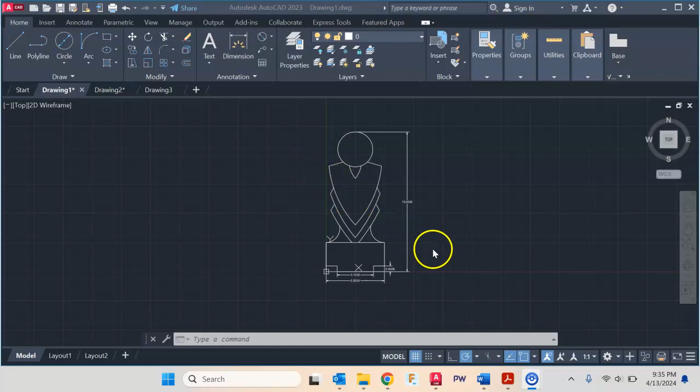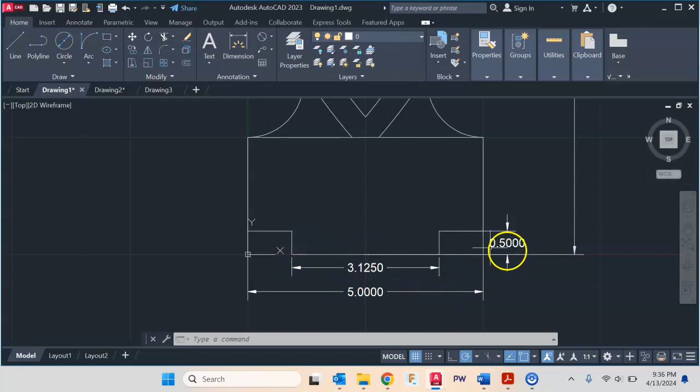Just to give you an overview of the process to get started, I went ahead and used the overall size parameters to create a design to show you. Here I have a potential trophy or award that I could use with the LED base. The overall width here is 5 inches by 12 inches. The cutout at the very bottom has a little bit of a shoulder on both sides - think of this similar to a tenon, like a mortise and tenon joint that we make here in class. That needs to be 3 1/8 for the length and 1/2 inch deep.

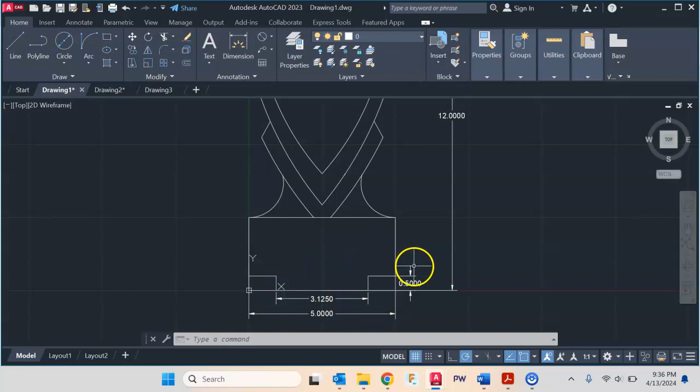So the best thing for you to do is draw the 5 by 12 box or rectangle like I started with, and then give yourself some offset lines, similar to the keychain project, or some construction lines to offset, so you can find dead center and be able to offset the drawing both ways.

Okay, so I would go ahead and create a rectangle. I'm going to start by drawing this in and putting in my measurements, because you can't measure after you've drawn the rectangle - you have to measure as you are creating it. So 5 inches, I'm going to lock that in by hitting the tab button, and 12 inches as well.

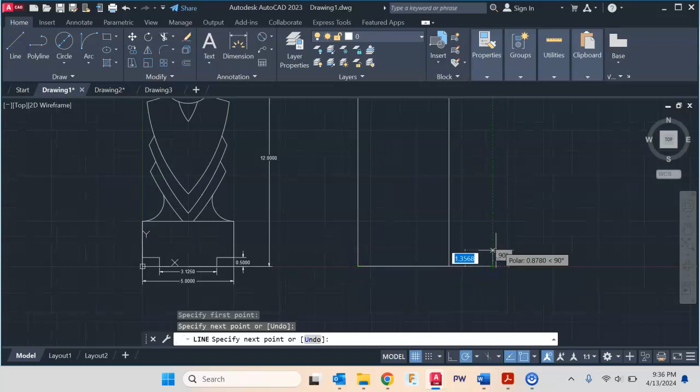At this point, I can go ahead and use the line tool and draw some reference lines here. I like to do one along the bottom edge as well as one along the side.

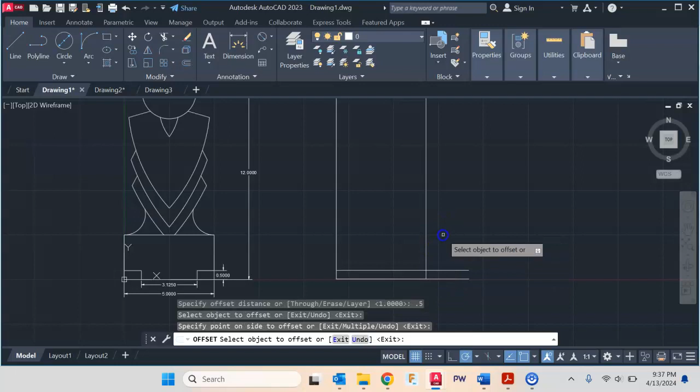So I know that the bottom piece of the acrylic can't be any more than 1/2 inch, so I'm going to choose 1/2 inch for that. I'll use the offset tool, type in 0.5, and select the bottom line that I drew and move that up into the rectangle. Then I'll offset that vertical line off to the left side, but I have to change how much I'm offsetting.

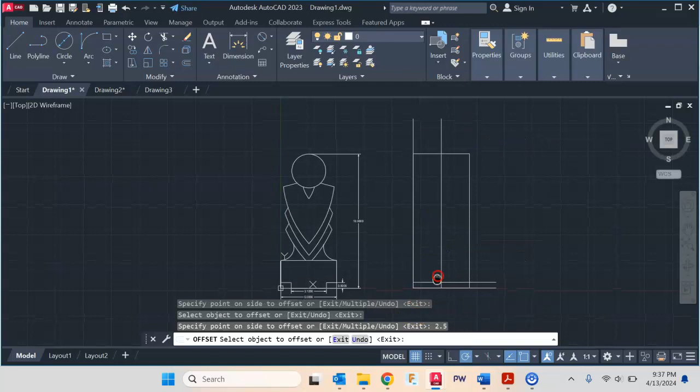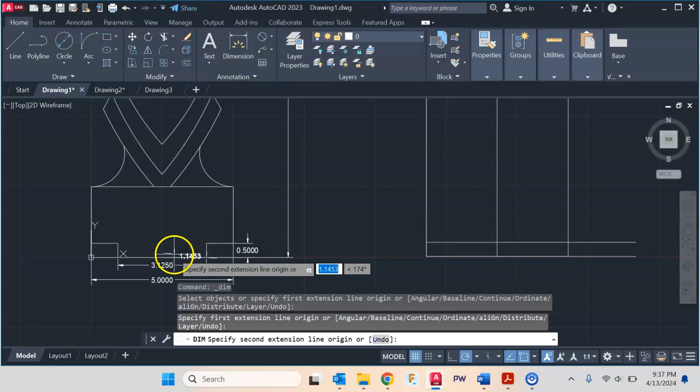So again, the overall size you can work with is 5 inches, so I'm going to put this in the middle of 5, which would be 2.5. From here I can give myself another offset to show the shoulder. As a review, what I did was draw half of this bottom piece so I can find the center, and that is 1.5625.

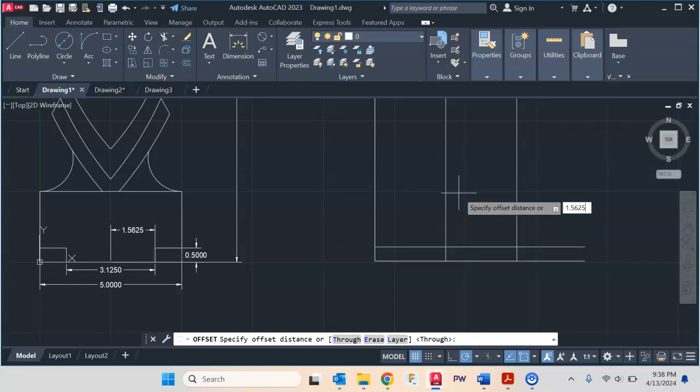So specify my distance, 1.5625, hit enter and select that line, offset it both ways, and then I can go back and use the trim tool to get rid of anything that I don't need.

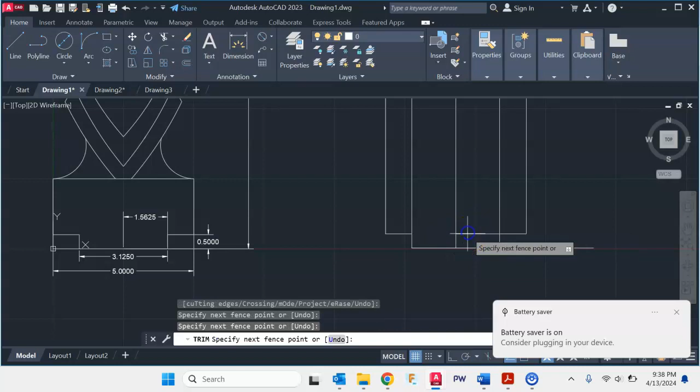All right, so that gets you started. Obviously your designs are going to be up to you. One other thing I want to point out is that anywhere you see a line, that is going to be a spot where the laser would cut. So for this example, I would need to do some trimming here.

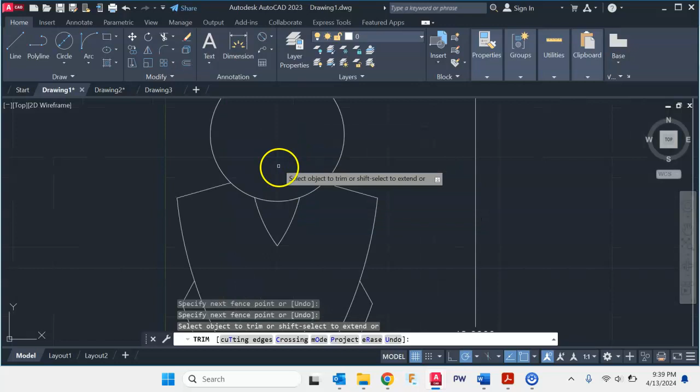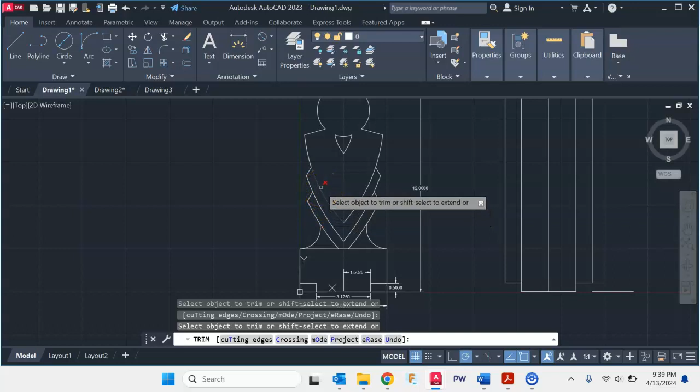For example, at the very top, this circle here - if I wanted to keep this circle intact with the rest of the design, I would need to trim here and here to keep that. Same thing along the sides - if I keep this line down the middle, I'm going to cut through that, so I will need to trim that as well. You can see how things will have to be changed or altered.

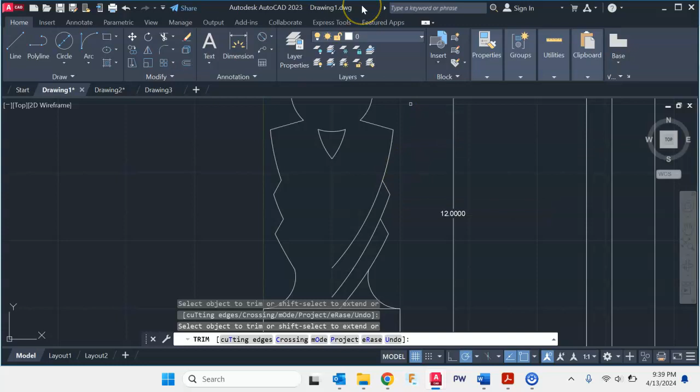Now, if you really like these lines and want them to be engraved, that's fine. What will need to happen is we'll actually create two AutoCAD files to import into the laser program to cut this out and engrave it. We'll talk more about that in the next video or next portion of this project.

So just keep that in mind - anywhere you see a line, that's going to cut all the way through, so you'll need to delete those things. As far as submitting, we'll go over that in the next video as you work through this assignment.